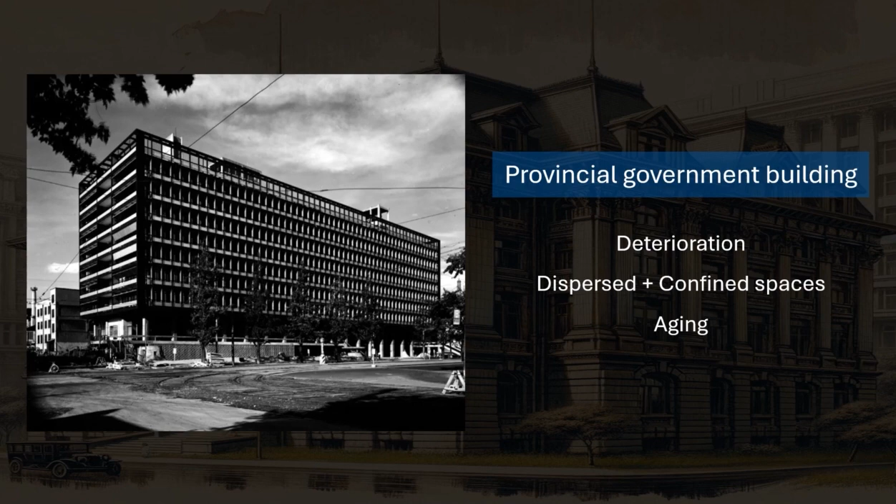On August 1985, the basic plans for the construction of Tokyo Metropolitan Government Building was announced. Through these plans, the province of Tokyo proposed to move administrative functions such as the main office and provincial assembly to Shinjuku district, while placing a forum with a citizen hall capable of holding an international conference at its core in Marunouchi district.

Following this announcement, plans for creating a Tokyo International Forum in Marunouchi district got underway in detail. In designing the building to not only guarantee symbolism and create topicality, but to also increase participation, the idea of holding an international design competition was proposed. Under the official approval of the International Union of Architects, the first ever design competition in Japan was held. As a result, Rafael Viñoly was selected to oversee the designing of the building.

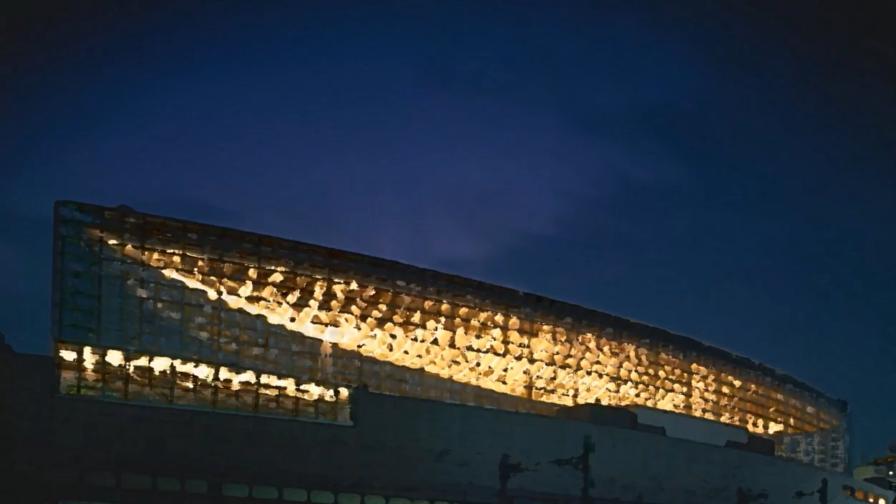As we talked about last week, we're going to take a close look at underground work. Before we move on to our main topic, we need to look at the first step of the construction process, which includes the architect's departure from postmodernism, problems encountered on site like bubbles and artifacts, and three main points of focus during the construction process. Afterwards, we will conduct an in-depth analysis of underground work, focusing on the top-down method and slurry wall installation.

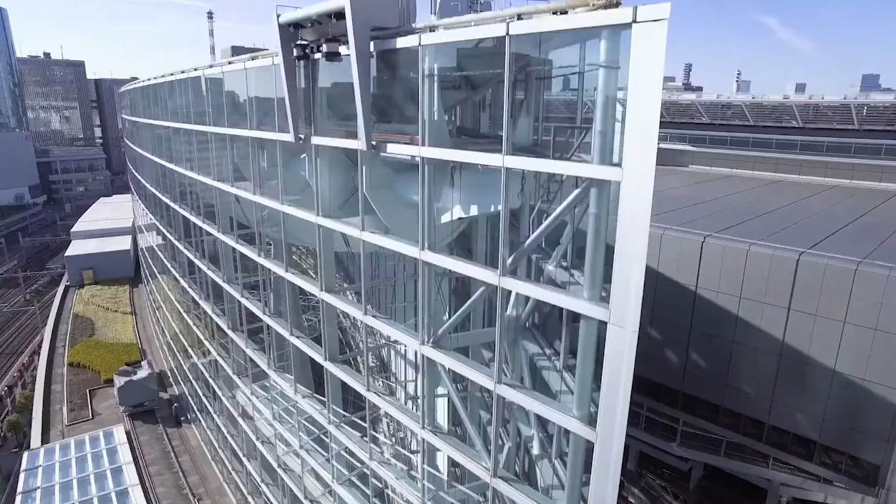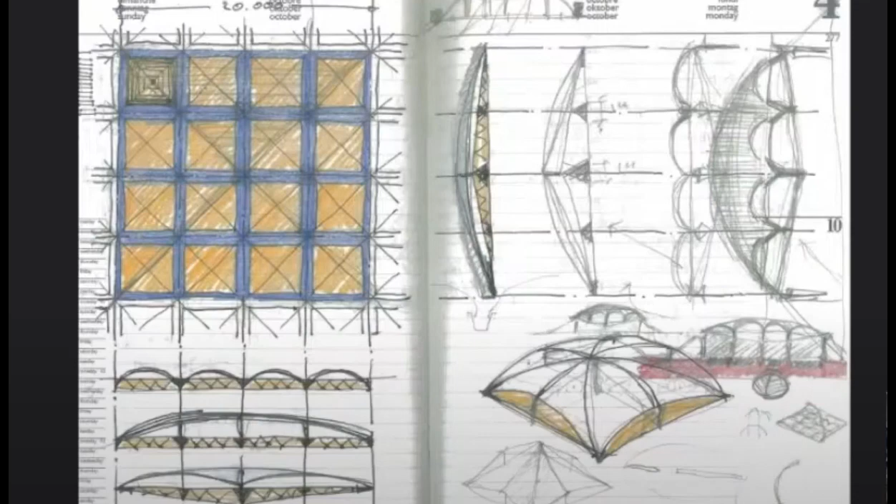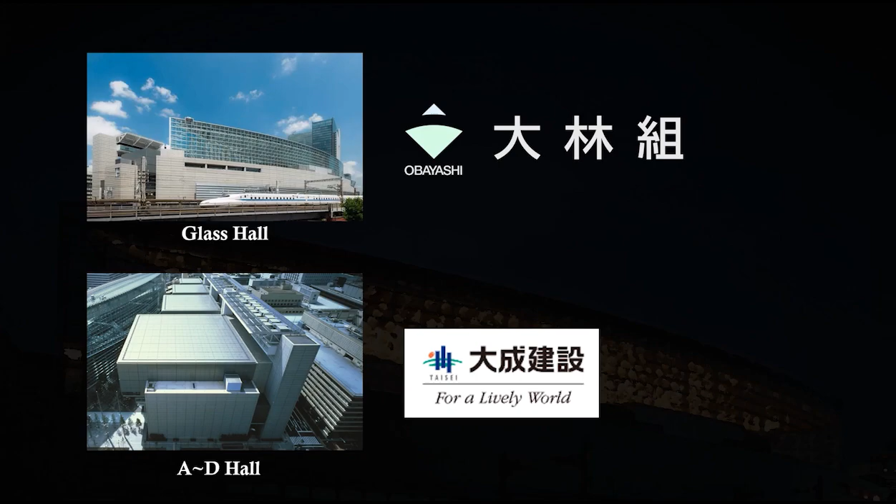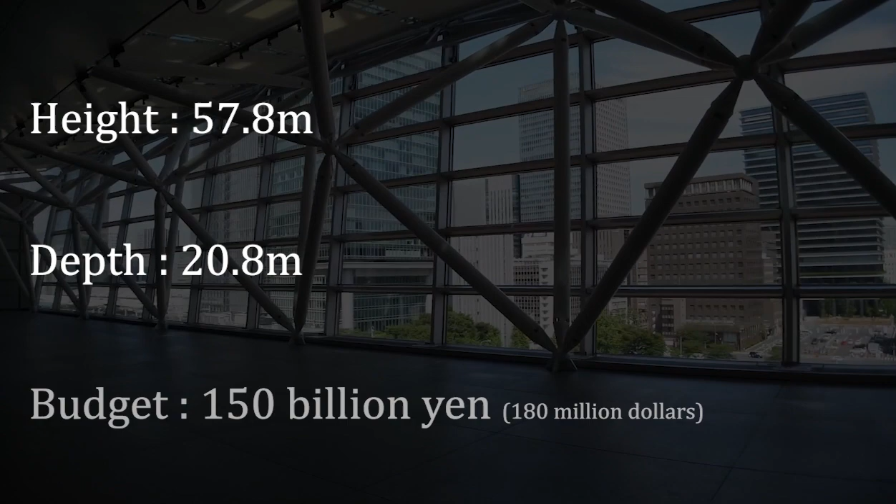As for the actual construction, the two main construction firms that took part were Obayashi Corporation and Taisei Construction. Obayashi Corporation was in charge of constructing the glass hall, while Taisei Construction was in charge of constructing the rest of the halls. The resulting building is 57.8 meters high and its basement is 20.8 meters deep. The budget for this construction was 150 billion yen, which approximates to $180 million.

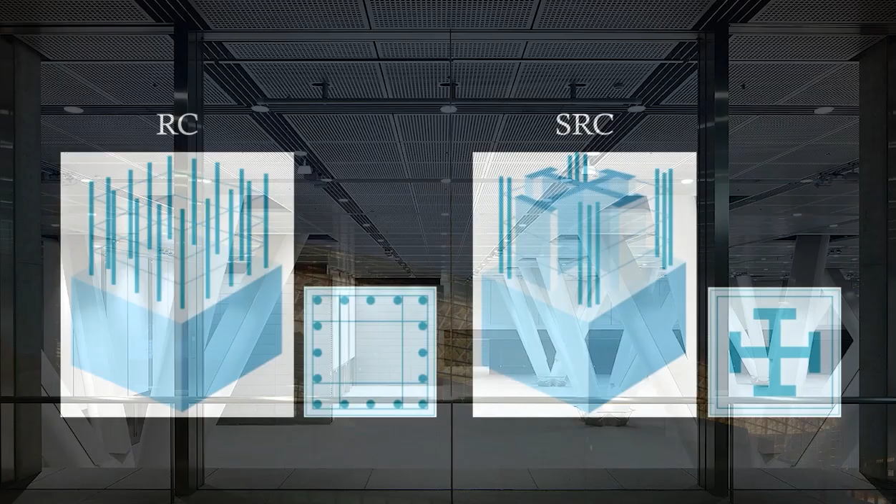On March 1990, the province of Tokyo signed the contract with Rafael Viñoly on the basic designing of the forum. The structure was mainly composed of reinforced concrete, steel reinforced concrete, precast concrete, and pre-stressed concrete. Rafael Viñoly was strongly critical of the postmodernistic trend that was prevalent and widespread within the field of construction at that time. This led him to commission the basic structural design to SDG, a structural design firm led by Watanabe Kunio, who valued designing on the basis of technology engineering.

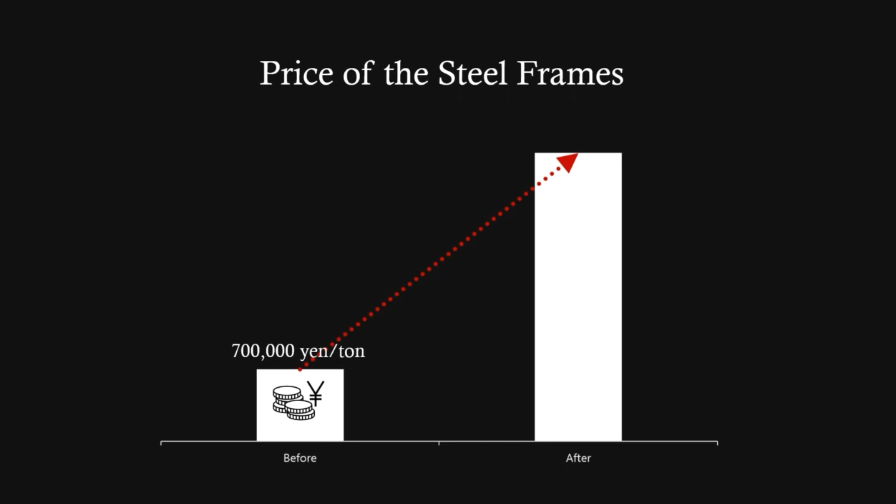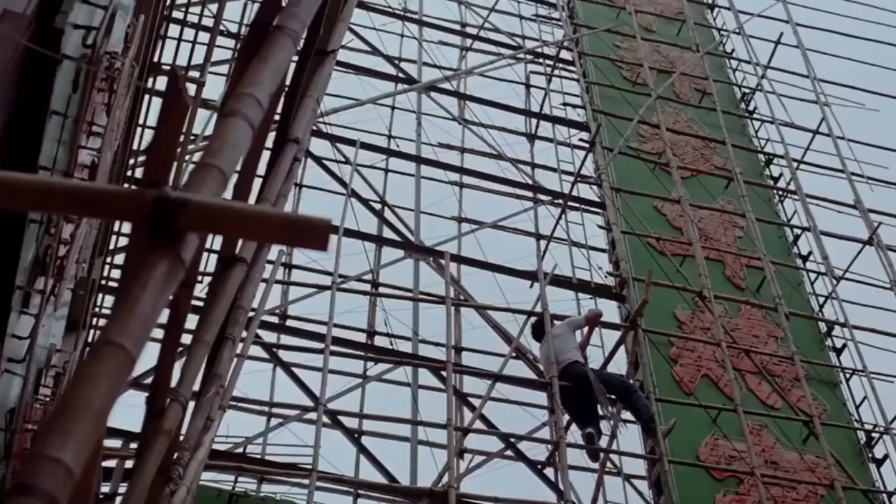However, they soon came across a problem. When first designing the building, they estimated that the price of the steel frames wouldn't exceed 700,000 yen per ton, so they set the budget accordingly. But there was one variable they could not foresee. On February 1991, as they were preparing to begin construction, the price of steel frames increased to 2.8 million yen per ton, four times the planned budget. This was due to the Japanese asset price bubble, which showed no signs of dying down.

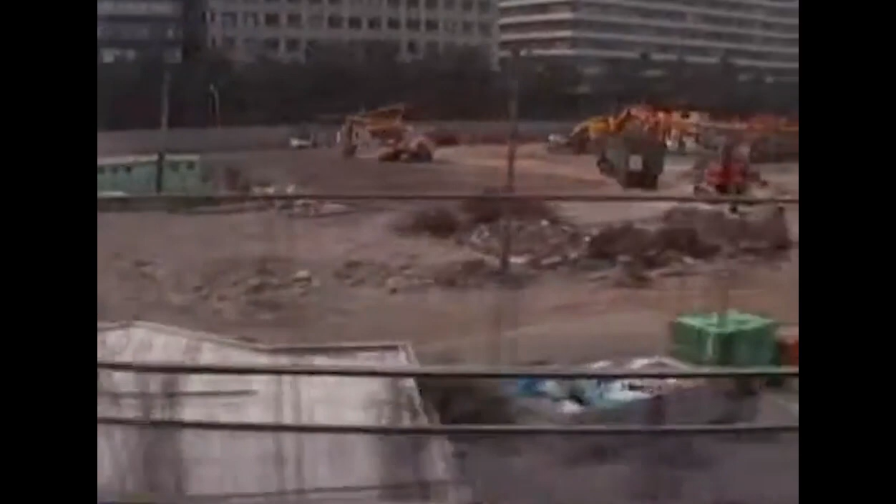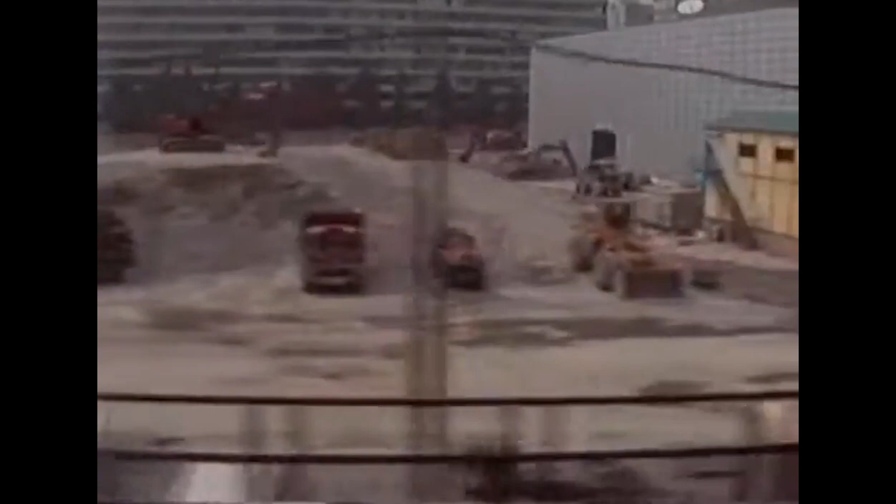To combat this, the construction team decided to initiate an excavation search for historic sites based on information that there was a house of a daimyo, an aristocrat of the Edo period, on the plot of land. This decision was based upon the construction team's accurate estimation, in the early months of 1991, of the collapse of the bubble caused by Japan's restrictions on the total amount of loans. They correctly anticipated that this would lead to a sharp decline in the price of steel frames, dropping significantly down to the original budget of 700,000 yen per ton.

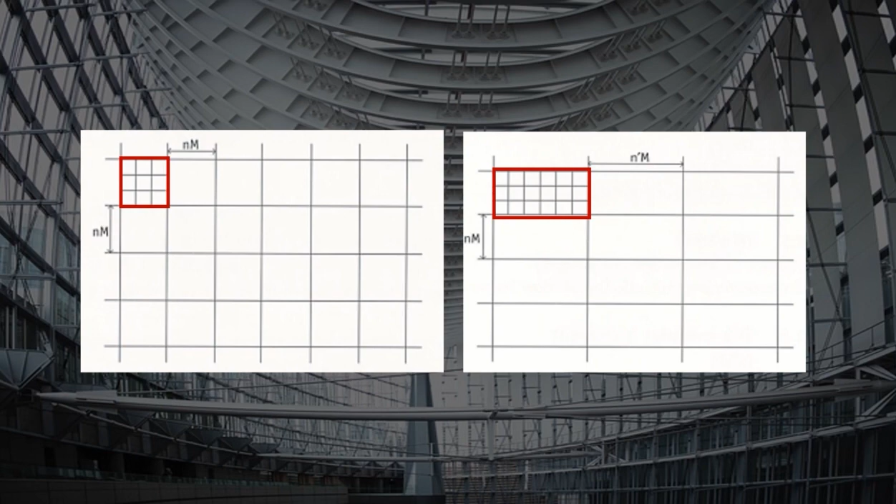During the excavation search between June 1991 and October 1992, the construction team immediately began the construction process in October 1992 as soon as their budget conditions were met. They first planned to use a 10 meter by 10 meter grid for construction, but soon realized that a 9 meter by 9 meter grid would be more beneficial, as it is considered a more appropriate size for efficient design of steel frame structures, allowing for more economical placement of structural elements.

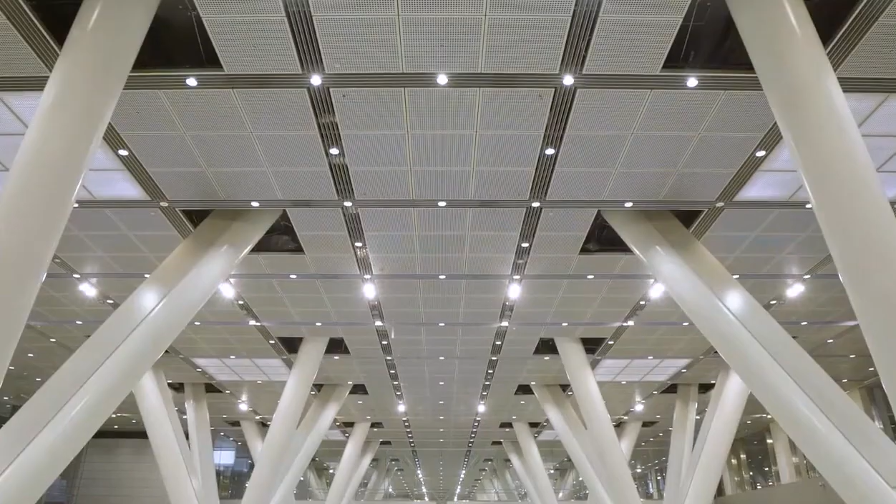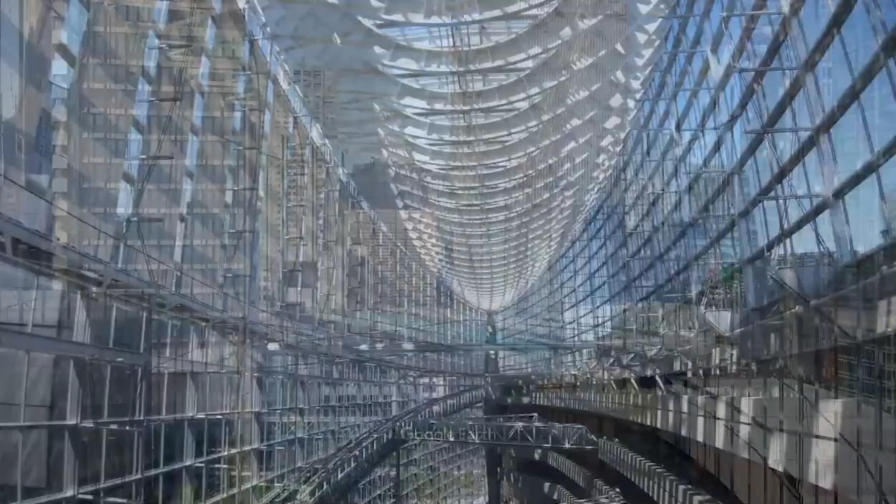Not only that, since most structural elements come in sizes that fit grids in multiples of 3, this decision would also cut unit costs. With their newfound plans, the team was able to begin construction, but they were soon met with more problems. The plot of land on which the forum was to be built was surrounded by 4 underground railroads, and the forum itself was designed as a complex steel frame-based structure, leading to several complications in the initial construction process. To solve this, several efforts were made, such as the jack-down construction method used for the roof of the glass hall, and the sliding formwork method used for Hall A's roof. With the effort of the construction team and the use of state-of-the-art methods, the construction ended in 44 months.

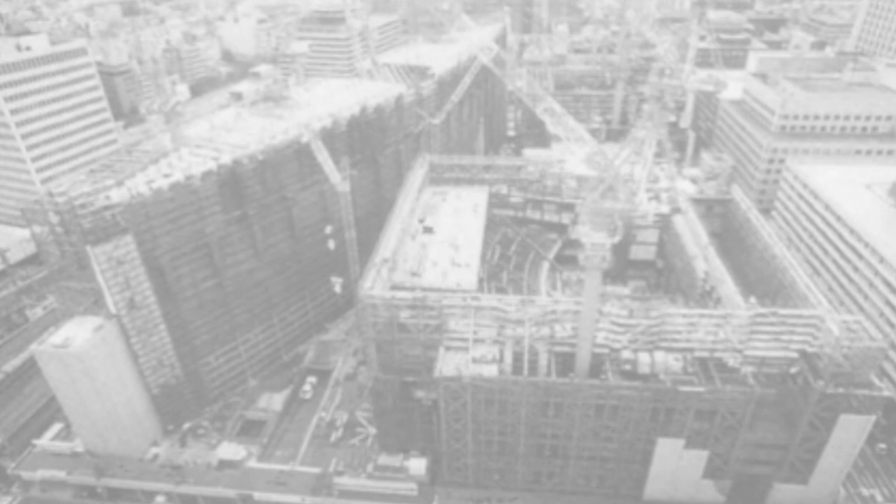The construction was analyzed by focusing on three keywords: earthquake, wind force, and vibration. As we continue the study, we can see how these issues were resolved during the construction process and what trials and errors were encountered along the way.

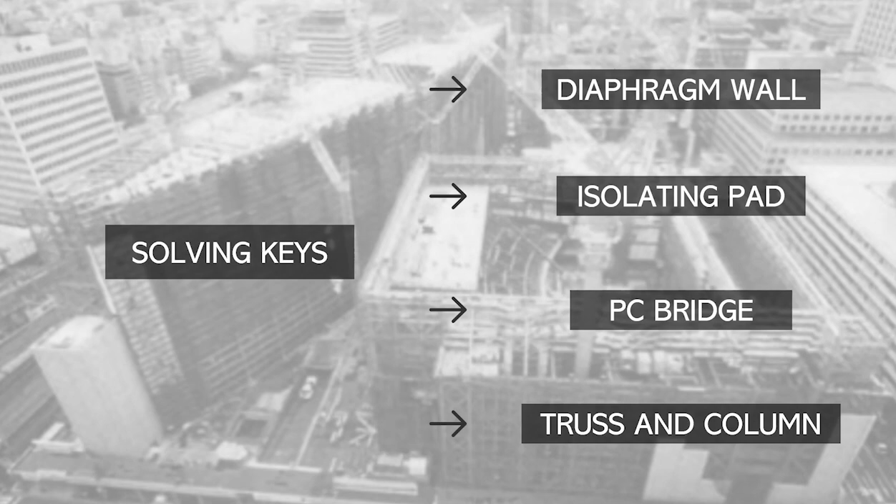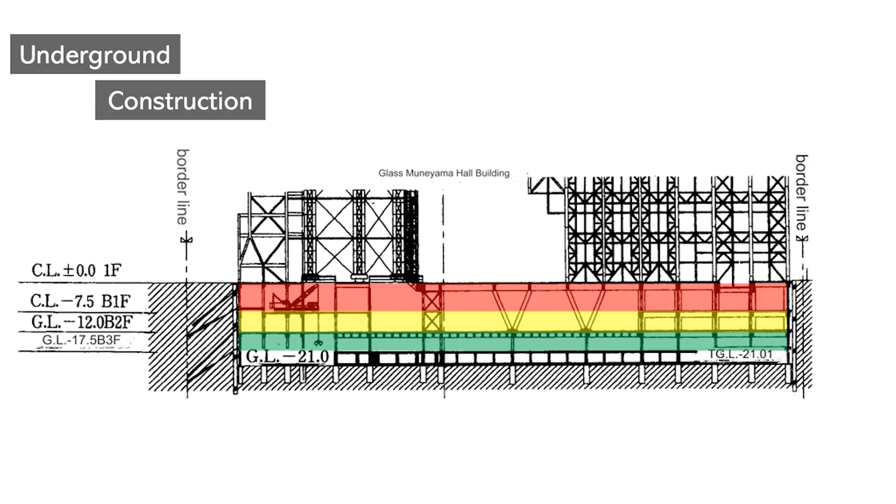This time we'll handle the foundation work, and next time the superstructure. Let us tell you about the underground construction first. The underground part of the Tokyo International Forum is a reinforced concrete structure with 3 underground floors, and due to the narrowness of the site and the subway line adjacent to the site boundary, they used the top-down method.

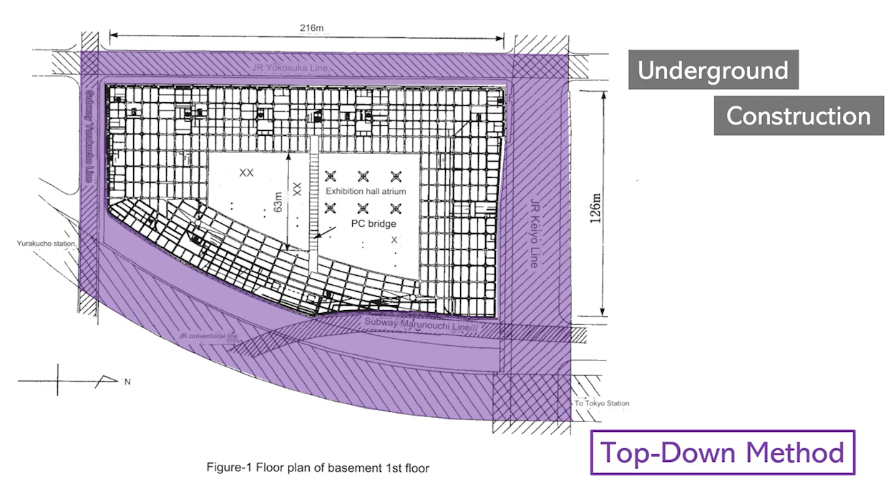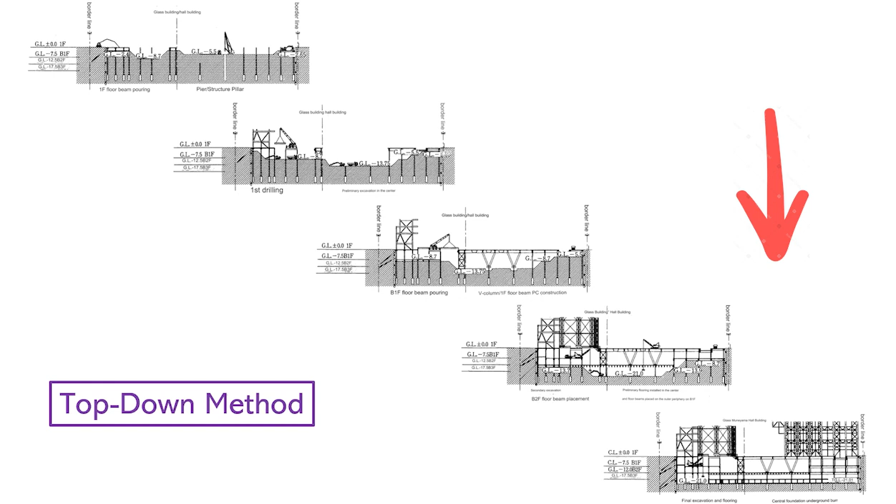Let's look at the top-down process of the Tokyo International Forum step by step. Here are the 5 steps of the top-down method used in this construction. The ground is gradually dug up and the underground level is lowered. At the same time, the steel structure is raised. The floor slab is built, so the ground level is also raised.

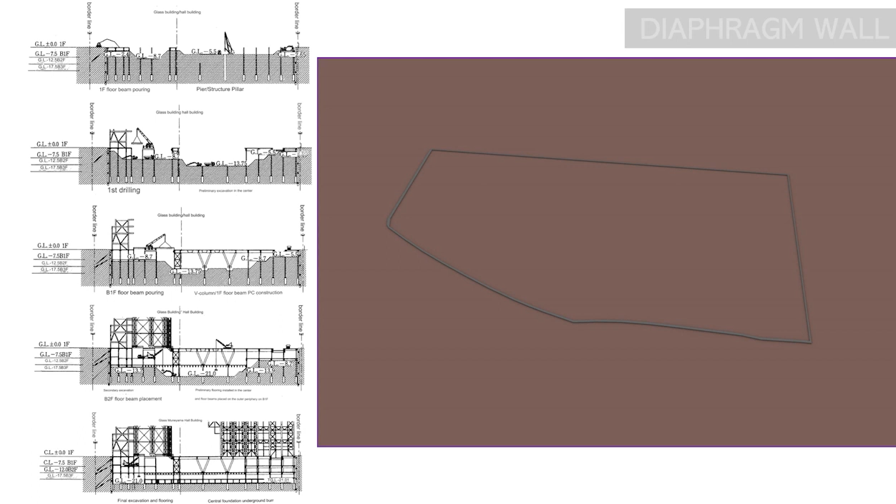At the start point of construction, they built a diaphragm wall with concrete, and this is the first important point of the underground work in terms of the vibration problem we mentioned. The method used to create the diaphragm wall is called slurry wall installation. Before we get deep into this story, let me explain the remaining steps, and then we'll get back to it.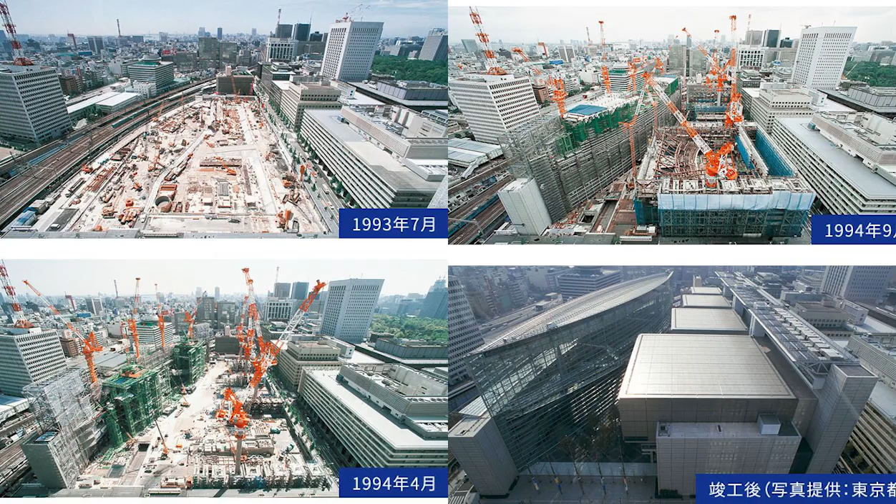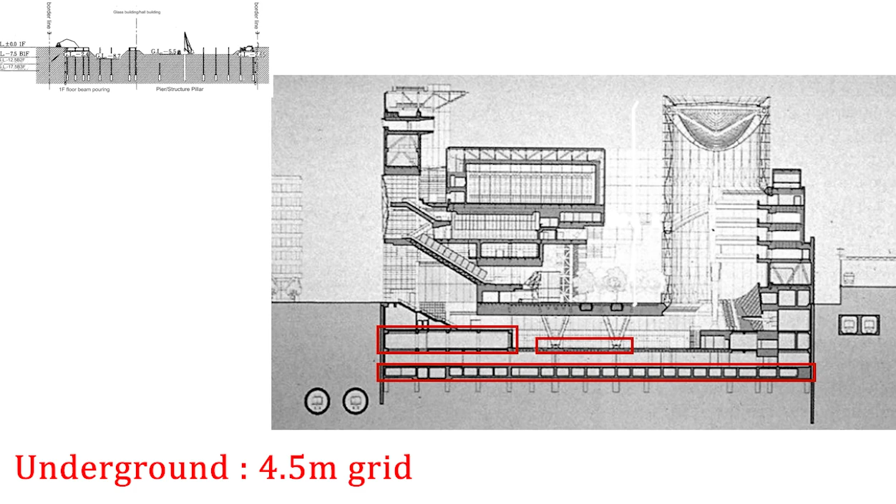The cross section also shows us the piling of the underground columns. Considering the module of the Theater Hall, they made a grid with a width of 9 meters. Specifically, they built an 18 meter grid for the concourse hall on the first basement floor, and a 4.5 meter grid for stability at the deepest underground level. You can see the piling works of all columns in this 3D model of the construction process we made.

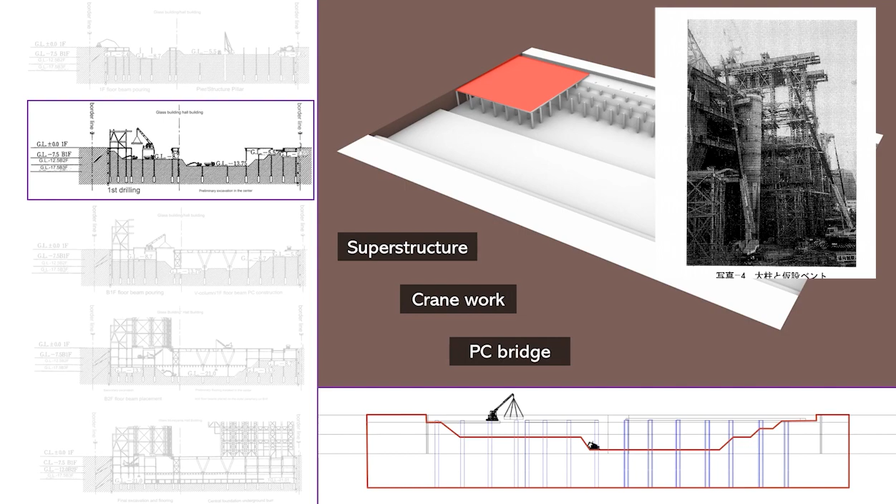The second cross-section shows us the temporarily placed concrete. Thanks to this temporary concrete slab, there's no need for scaffolding. It also allows for safe working postures and improves work efficiency. This concrete slab is for the subsequent work: the superstructure, crane, and PC bridge slabs. They dug the center part of the ground, which is for the concourse hall and the open plaza, because steel structures had to be built on both sides.

Now for the third step: they built V-shaped columns in the concourse hall section on the second basement floor. The reason for the V shape is to create the open space that the architect Viñoly emphasized. They also made the ground level floor slab, which leads to the next process.

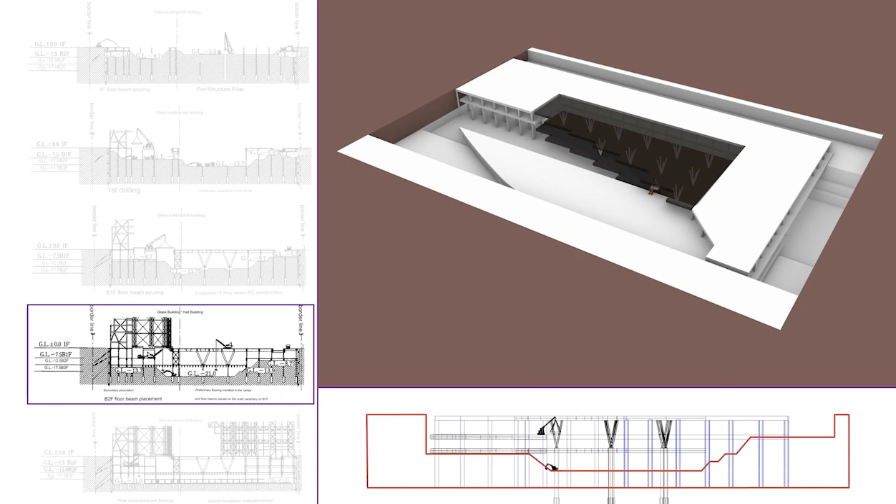They can make a PC bridge on the first basement level thanks to the strong axial force created by the V column. This PC bridge is another important point about construction technology, and has a big role in enduring earth pressure. So let us handle this issue next week.

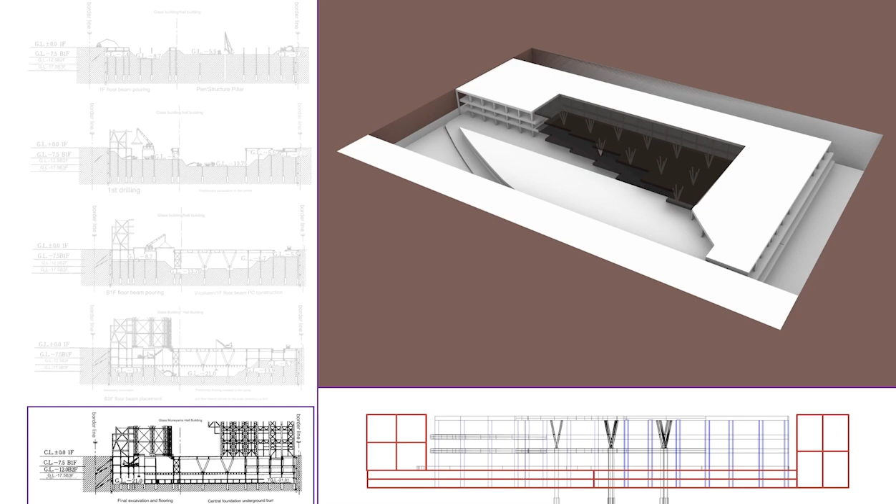Coming back to the fifth step, they finally dug the ground of the whole site deep to 21 meters, and the underground construction was finished. Now that we've looked at the steps of the underground construction process, let's talk about the slurry wall installation, which was step 1 as mentioned earlier. The diaphragm wall was constructed a little away from the main structure to reduce vibration from the subway.

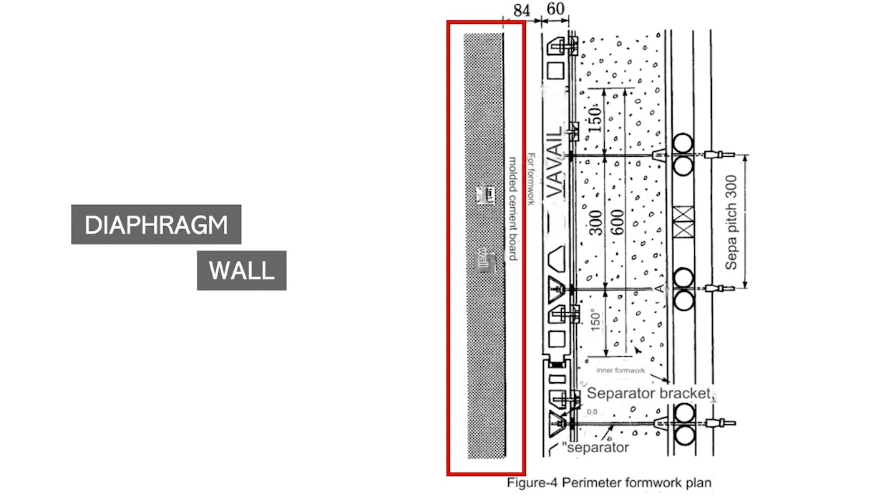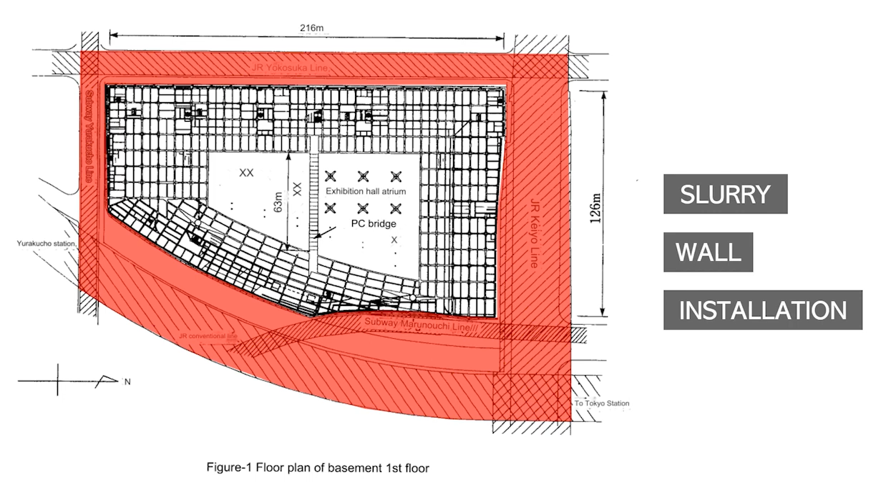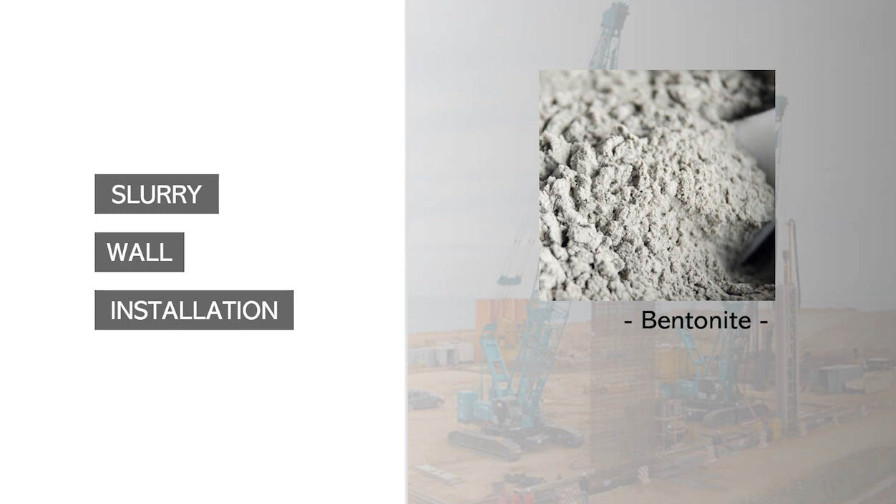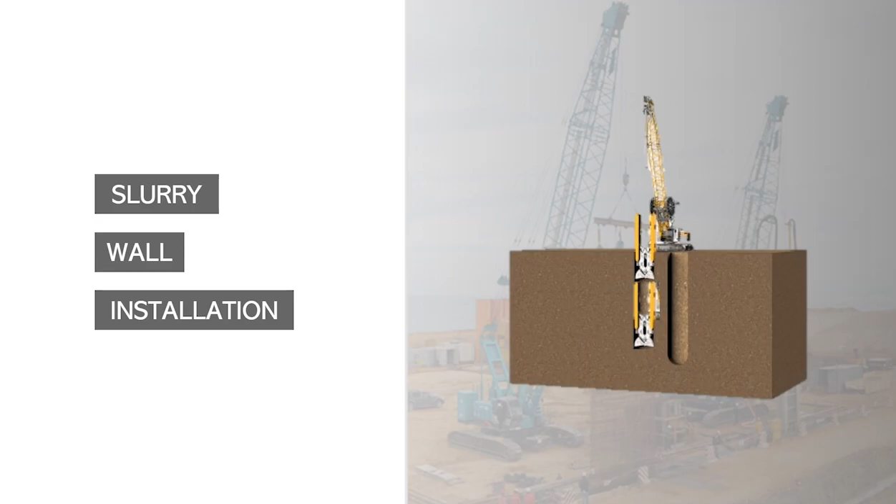What was the requirement for this process, considering the conditions of the site? The site is located at the center of the city, so construction had to be done with lower noise and vibration, and it had to be strong against earthquakes. So the construction company used the slurry wall installation method. This uses bentonite as a stabilizer, which enables pouring concrete into the deep ground, so that eventually an underground concrete wall can be made without digging up the whole site's soil. Here is the process.

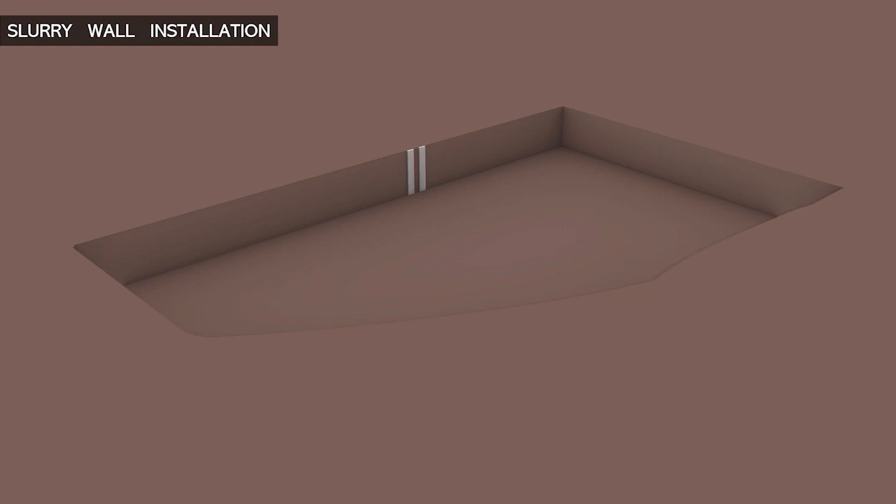First, they constructed 2 parallel guide walls made of low-reinforced concrete cast on the working platform. These narrow guide walls outline and precisely define the structure to be built, and also make space for a BC cutter to get inside the underground.

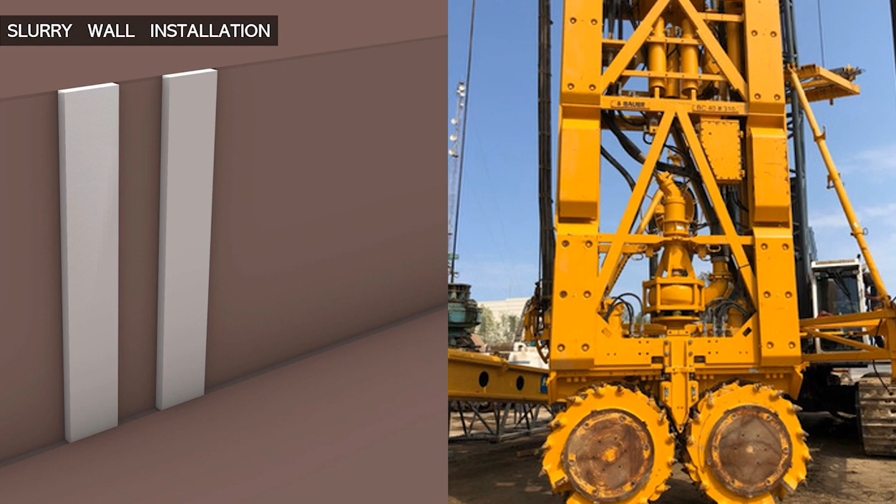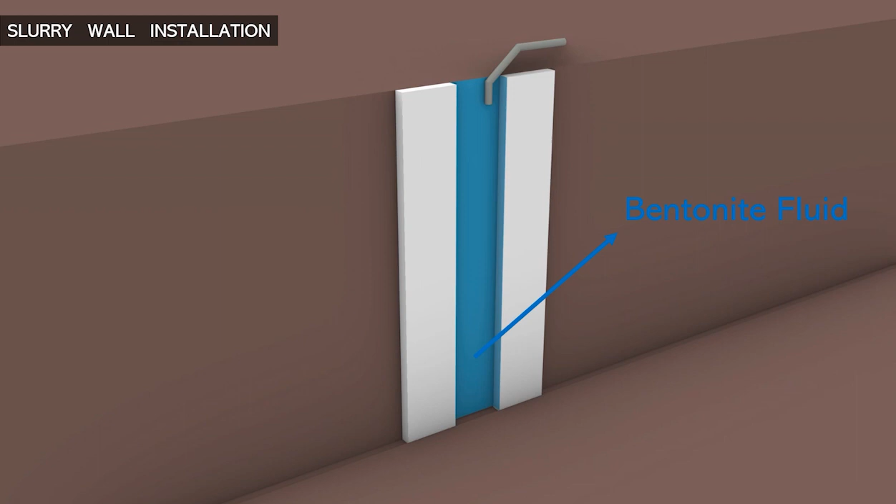Second is the excavation phase, made of one or several overlapping bites forming a panel, with the help of a support fluid, the bentonite. Bentonite forms a local cutoff barrier on the sides of the excavation. This barrier keeps the excavation open by applying hydrostatic pressure that counteracts the earth pressure, which tends to collapse the sides of the panel.

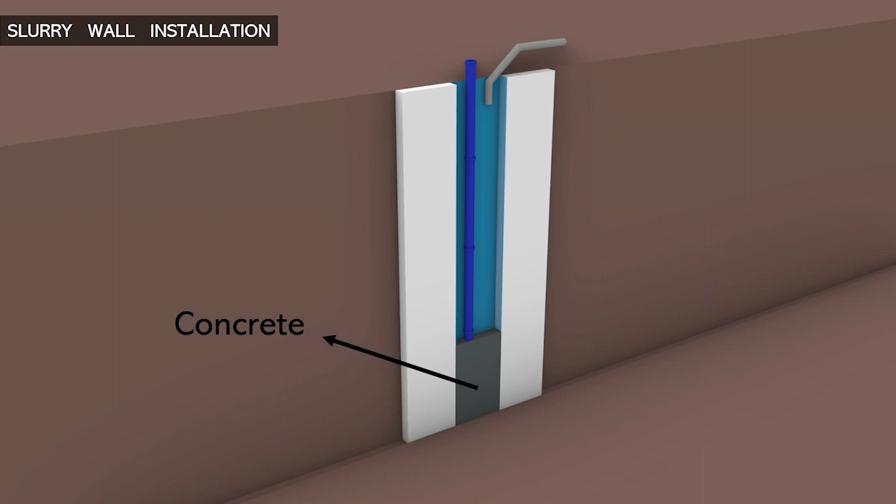Third, the steel reinforcement is put in place and the concrete is poured by the tremie pipe. At this time, the tremie pipe should be deeper than the concrete paste to prevent material separation. While the concrete is poured, the bentonite fluid naturally rises and is removed by the pipe connected with a BC cutter. As the concrete fills up, the pipe joints are separated and filling continues.

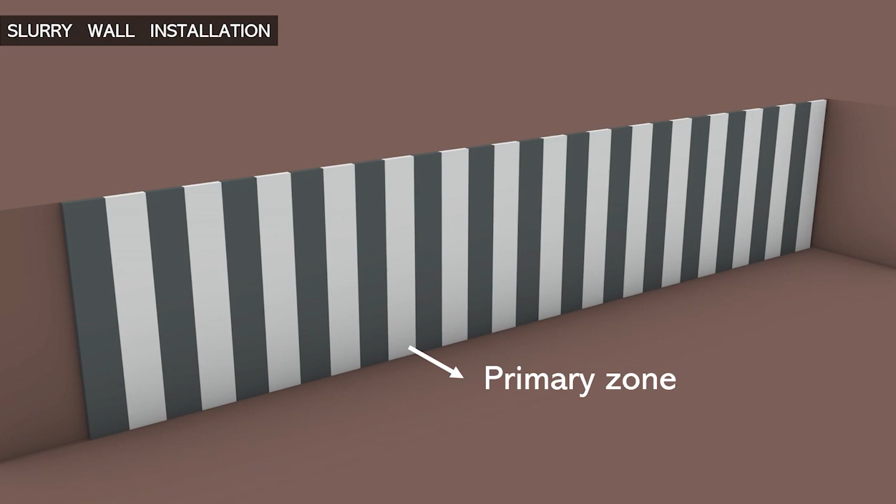Lastly, this work is repeated along the site boundary. The important point is that to prevent imbalance of rigidity between the side walls of the excavation, the work should be done in an intersectional way: these are the primary zones and those are the secondary zones.

On this diaphragm wall, vibration isolating pads are installed, and the perimeter wall is constructed apart from it, so we can solve the noise and vibration problem effectively.

Next week we'll continue with the underground construction, especially about the perimeter formwork and how to reduce vibration. These are also very important points about the underground construction.